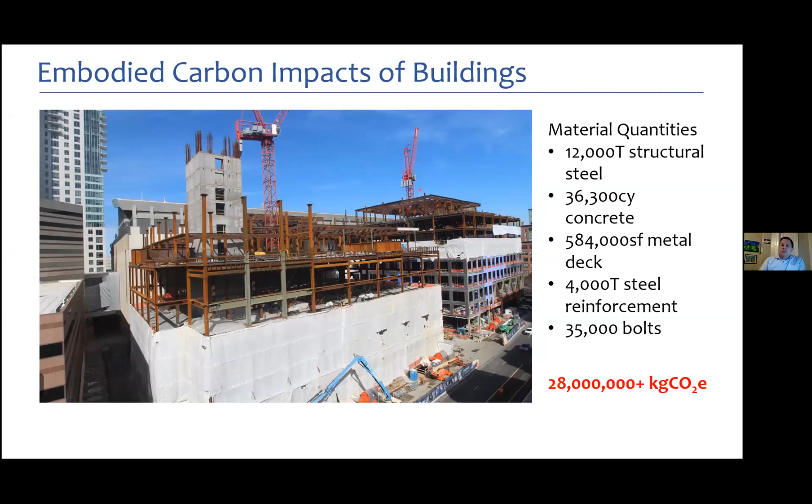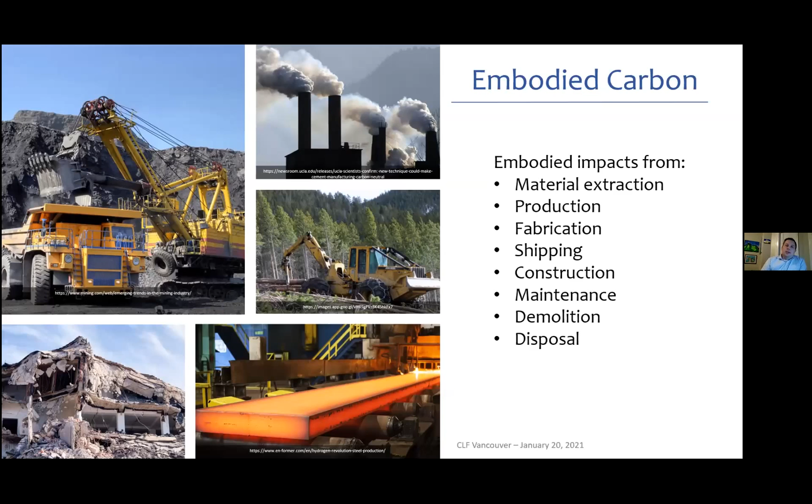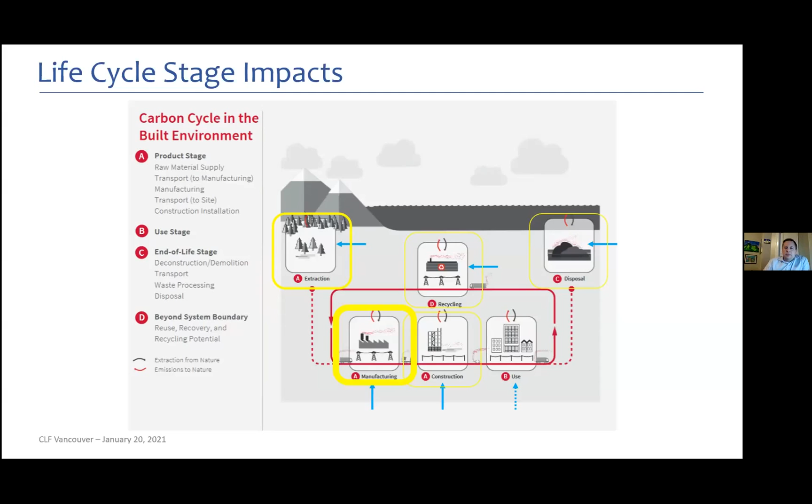I am not a life cycle assessment expert by any stretch, but I think it's important for structural engineers to understand the basics of it—that's about the most I can understand. With any building, there is a life cycle, and there are different stages associated with that. When I was looking into the embodied carbon impacts, they show up in a lot of the different stages, whether it's material extraction, manufacturing, construction, and to a certain extent the use case. If you're going through major renovations, there are certainly embodied carbon impacts associated with the materials of a renovation. But the more I looked, the more I realized that the manufacturing of the structural materials is by far the biggest impact, and that's something I'd like to touch upon a little bit today.

So here's a very approximate diagram of structural steel manufacturing and how you get to the environmental impacts. This was part of my personal learning curve. It turns out the structural steel manufacturing process requires a tremendous amount of energy and a tremendous amount of raw materials pulled from nature. Even in the case where steel is highly recyclable, you still have to break down that recycled material using a lot of energy and a lot of heat. On the flip side of the equation, there's a lot of emissions put back along with the dirty water byproduct. This is emblematic of extractions from nature and emissions to nature.

All of this stuff goes into different LCI databases that track the impacts of all the different processes, and those culminate into an actual environmental impact, like global warming, ozone depletion, acidification, and so forth. There are many different environmental impacts, but when we talk about embodied carbon, it's synonymous with global warming.

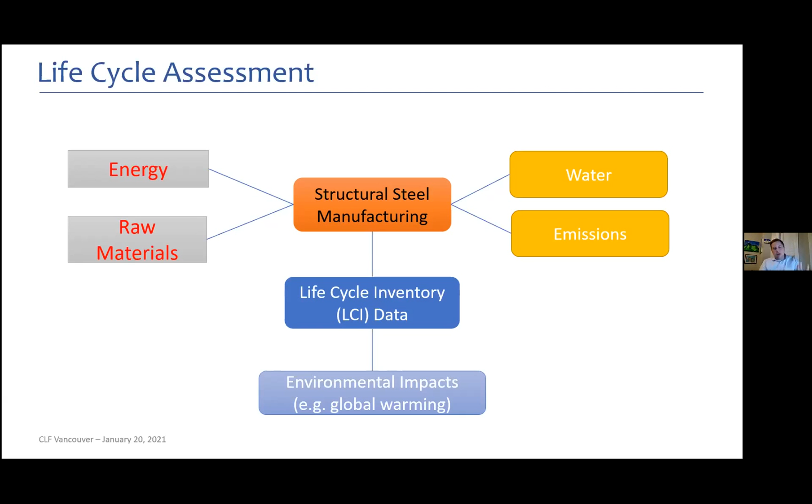This is an example of that, where you take emissions from three different greenhouse gases and multiply them by what's called a characterization factor. I'm skipping over a bit of stuff, but the point is that it's all being normalized into a single impact number, and that happens behind the scenes.

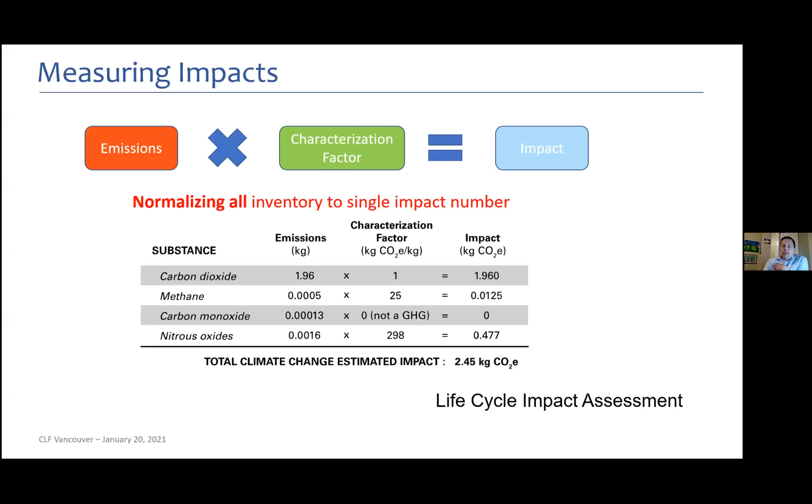That was important for me, and I think it's important for structural engineers and people in general who want to understand embodied carbon and where these numbers come from, because even in my short time working on this, in my own office, I've dove back into some of these numbers, so doing a bit of research ahead of time has paid dividends for me personally.

When it comes to structural materials, most have two sources of impact. One is they generally require a tremendous amount of heat, usually sourced from fossil fuels, which has a CO2 byproduct. Then there's a chemical reaction where there's an off-gassing of CO2, so it's sort of a double whammy.

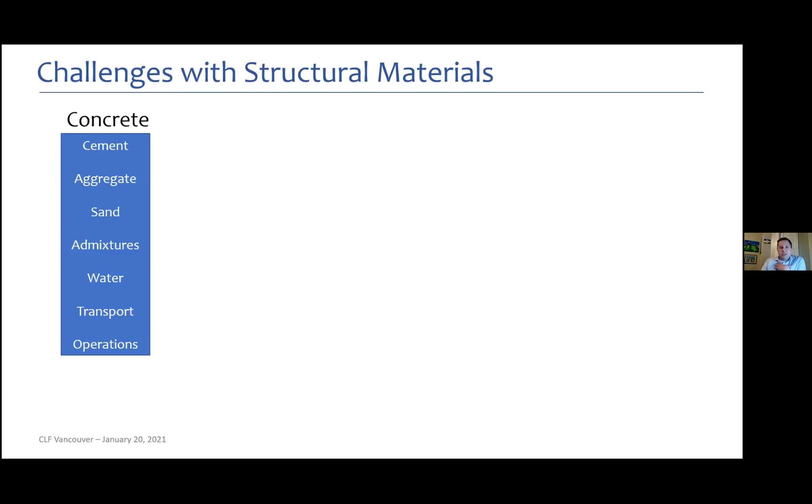That is very emblematic in the production of concrete. Concrete is made up of different constituent materials: cement, aggregate, sand, admixtures, water, and then there's transport and operations associated with all of that. But really, it comes down to 85 to 90% of the global warming potential impacts being from cement production.

When you dive into cement production, you're basically breaking down limestone rock with a tremendous amount of heat, and there's a byproduct of CO2. As it turns out, one ton of cement produced releases half a ton of CO2. That's not a particularly efficient system, right?

So to produce one ton of cement, half of the byproduct is CO2, which for me, every time I see these numbers, it's striking. Generally, depending on the numbers you read, cement production accounts for about 7 to 10% of the world's CO2 emissions. That's a number that often grabs people's attention.

If you're a structural engineer struggling to convince people why the structural materials and structural engineering world need to be involved with this, if you tell them that cement production of concrete is 7 to 10% of the world's CO2 emissions, they're going to start listening.

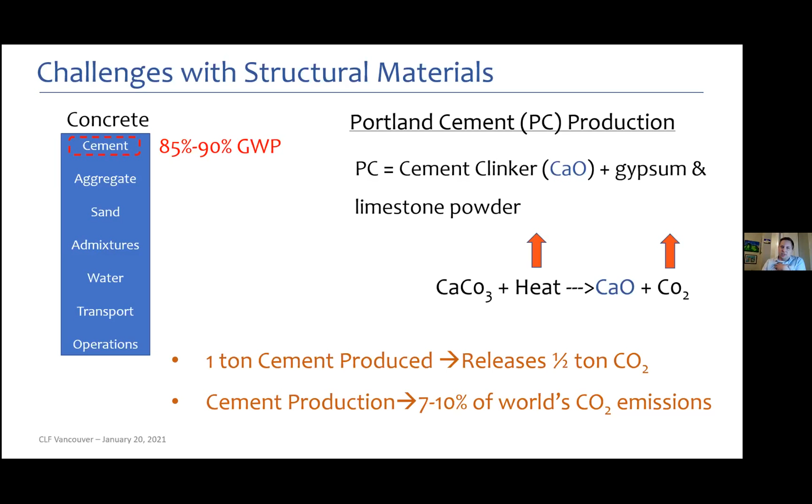One thing that's really important to talk about here is a declared unit versus functional unit, and specifically functional equivalence. It's very dangerous to just compare one ton or one kilogram of steel to one kilogram of concrete or timber without tying in some sort of performance metric to that.

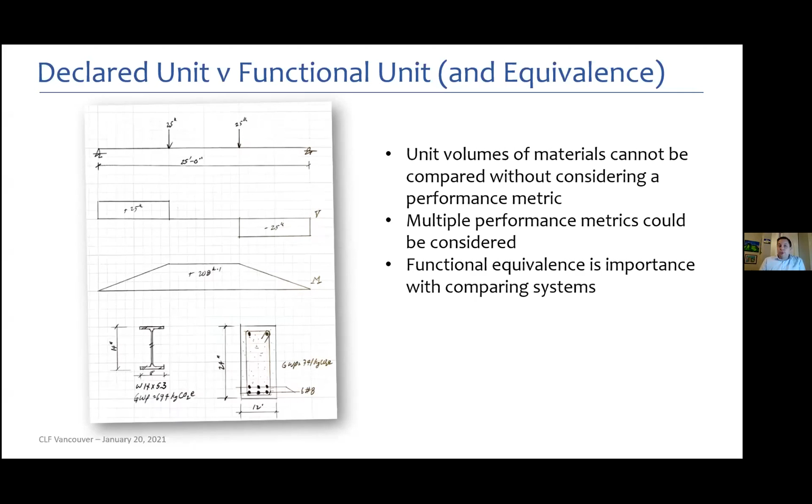Here's an example where we used a performance metric of a single typical floor at a particular live load and a particular elevation of the building, and compared a conventional steel framing system to that of a timber framing system. We were able to get numbers to compare.

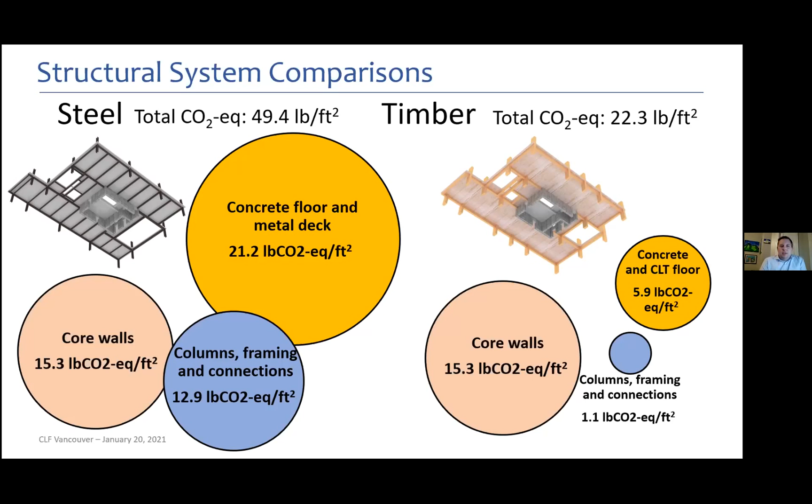Of course, there are a number of caveats here because this doesn't include foundations and the lower seismic mass and so on. But for this particular handful of performance metrics, this was enough for us to compare the embodied carbon that the architect, the contractor, and frankly the owner were very interested in.

You can go one step further, right? So you have the system-to-system comparison, but then you can start optimizing the system itself. In this example, if you have a steel base system and found a way to optimize it, whether removing beams where possible or reducing the impact of the concrete topping slab, you can get a reduction from that steel base.

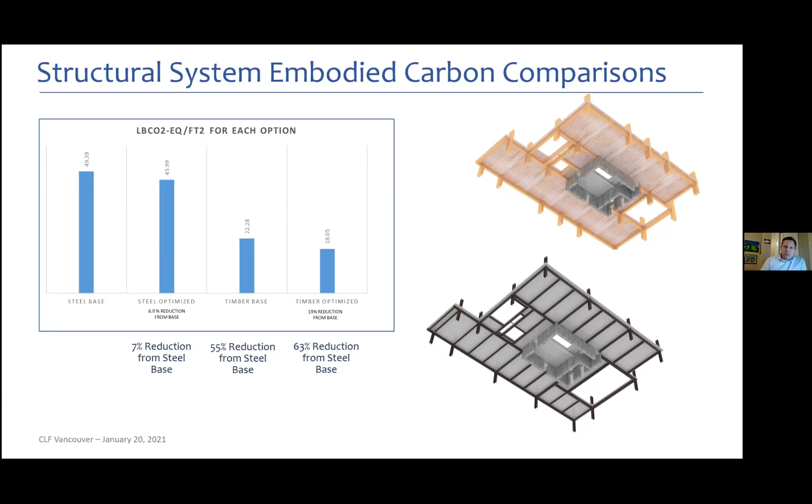Even in the timber condition, maybe you have a concrete topping slab on the timber CLT panels where you can find a way to reduce the cement content there and further reduce that. But again, I can't stress enough that it's very important for the structural engineer, architect, or sustainability consultant to make it very clear that you're comparing specific performance metrics.

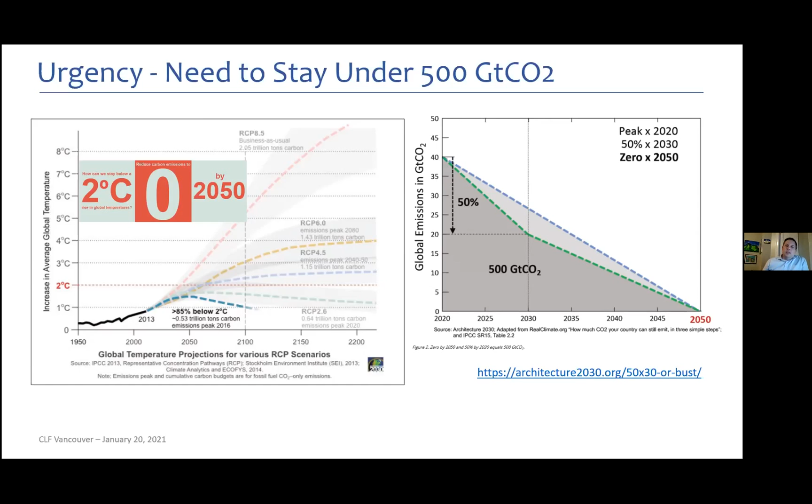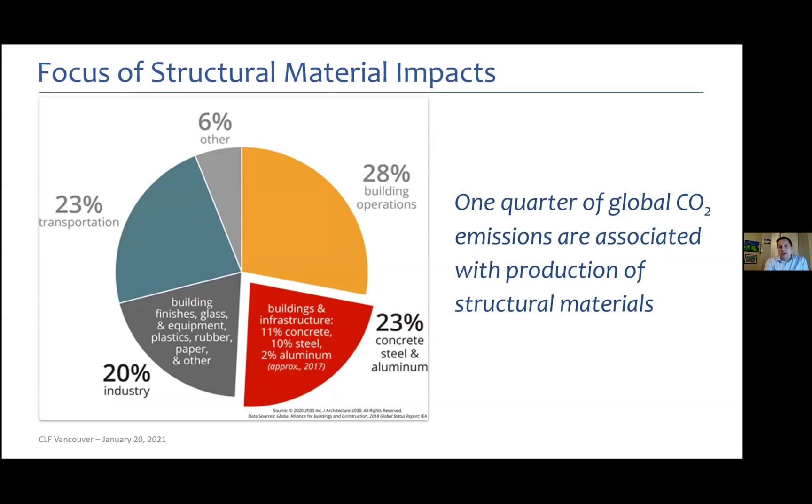When you look at the carbon impacts on a global scale, it turns out that a quarter of the global CO2 emissions are associated directly with the production of structural materials. That's another one, if you're trying to convince somebody why this matters in the structural world. Just sit with that number for a second: a quarter of the world's CO2 emissions are associated with the production of structural materials. It's a jarring number that should stick in the back of your mind.

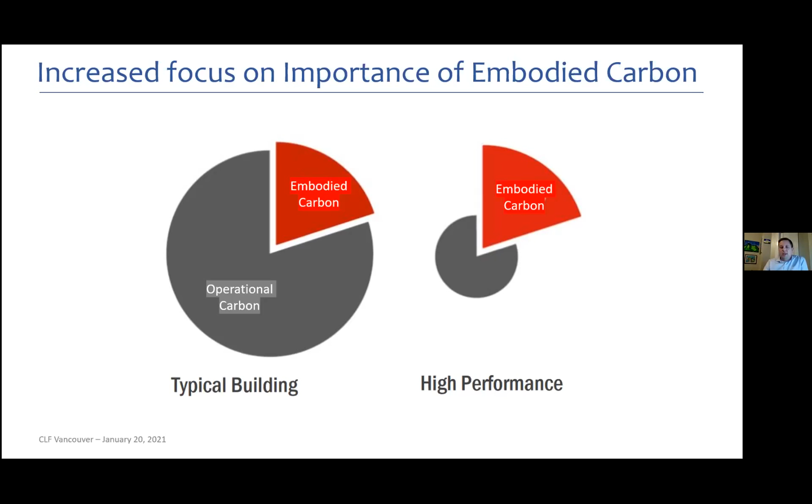One benefit, but an unintended consequence, of higher performing buildings where the operational carbon is coming down, has really shown a spotlight on the importance and the percentage of impact associated with embodied carbon. And this will only continue in the future unless we do something about it, as more and more high performance buildings come online.

So it's just emphasizing, and I'm probably preaching to the crowd, that the lower you can get the embodied carbon at the beginning of the project, the more you greatly improve the chances that we can achieve some of these net zero targets.

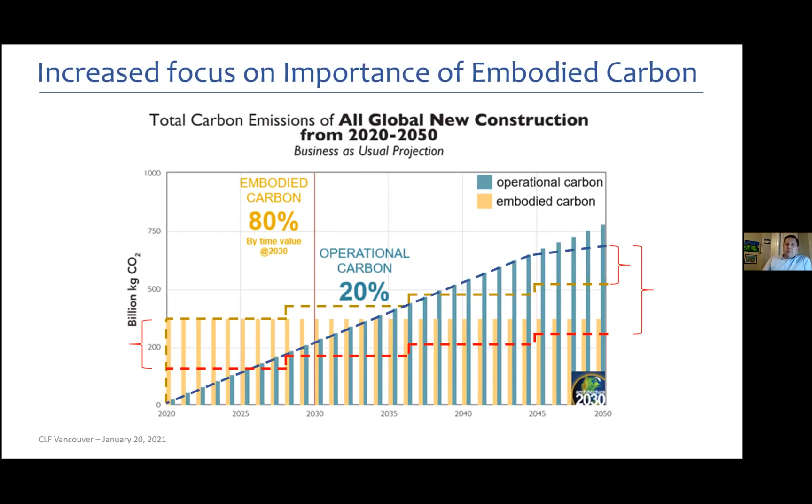Another aspect putting the spotlight on structural engineering is that, depending on which study you see or read, for new buildings about 50% of the embodied carbon is associated with the structure. In this case, a study done a few years ago showed about 50% associated with the substructure and superstructure for all different building types: office, school, and hospital.

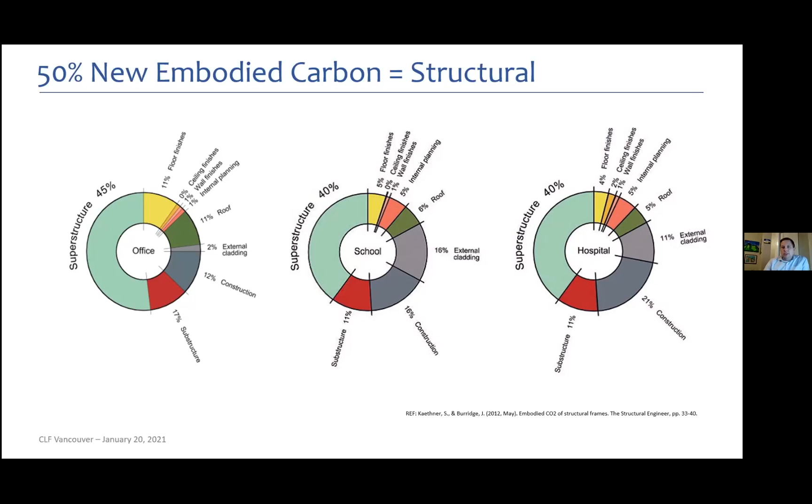Getting back to the structural engineer, to be fair, it's the whole design team - the architects, the sustainability consultants, the MEP engineers - but we really influence the project brief because we're connected to everything from initial concepts through construction and even into use and tenant work. So it behooves us as a structural engineering profession to really up our game, because we're talking to everybody.

Most successes come with buy-in from multiple groups, so why would we want to be the one group who's not contributing and buying in? Again, because embodied carbon happens up front, it's critically important that structural engineers are out in front as well.

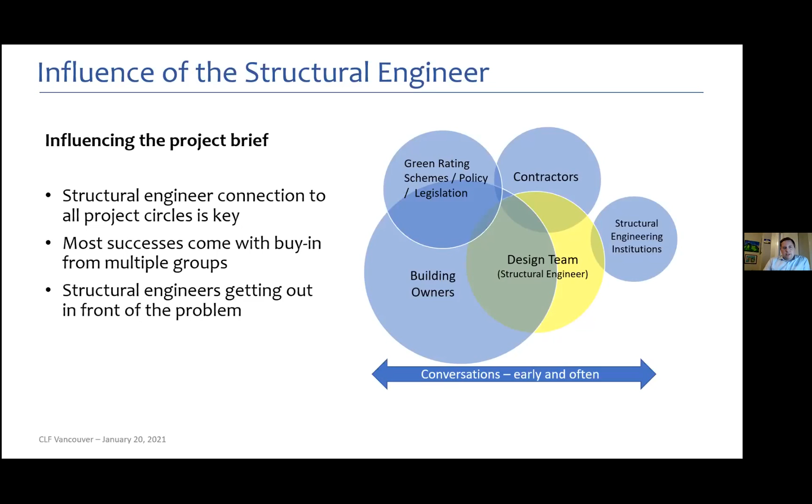Here's a not-to-scale plot breaking down the building stages: a design phase and a construction phase. If you look at embodied carbon and trying to optimize a system, early in the design phase you're reviewing different systems, and somehow you'll make a choice based on review of carbon budgets or some sort of target, and you pick that system. Of course, cost comes into play.

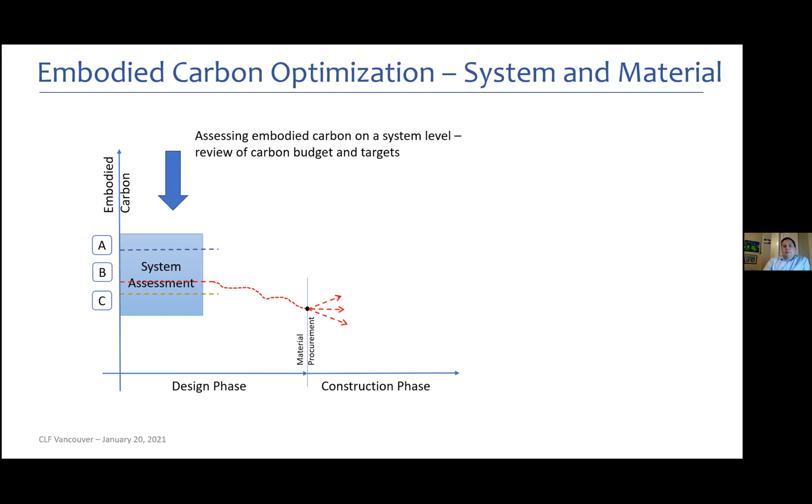Throughout the design phase, you'll be working on optimizing the system more specifically, probably focused on materials, and that's when specifications with material requirements for procurement are made. Then finally, in procurement, the contractor will do what they can to work with the required specifications.

But the reality is at procurement, we're a little bit removed, and so the impacts may improve, may stay the same, or may worsen. So all the more reason for us to make sure that initial embodied carbon is as low as humanly possible. The question is, where are we supposed to be? What is the benchmark for that particular system? And more importantly, where's the target? Where should we be aiming?

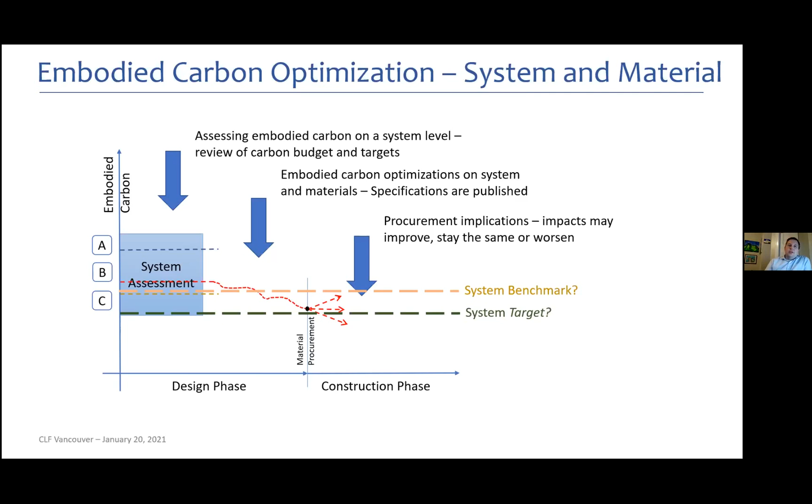I'm really excited because I think you're gonna learn a lot from Lauren, who's gonna get into all of this in greater detail. On the structural side, going back to optimizing a system and the role of the structural engineer.

Here's a simple chevron frame. We push on it with 100,000 pounds, and we have two braces: one is a wide flange, one is an HSS section. You do a comparison on strength, and the wide flange weighs a little bit more, so the HSS member is less. However, the material impacts of HSS, which is primarily from virgin steel versus recycled steel of the wide flange, the global warming potential is much higher for that brace.

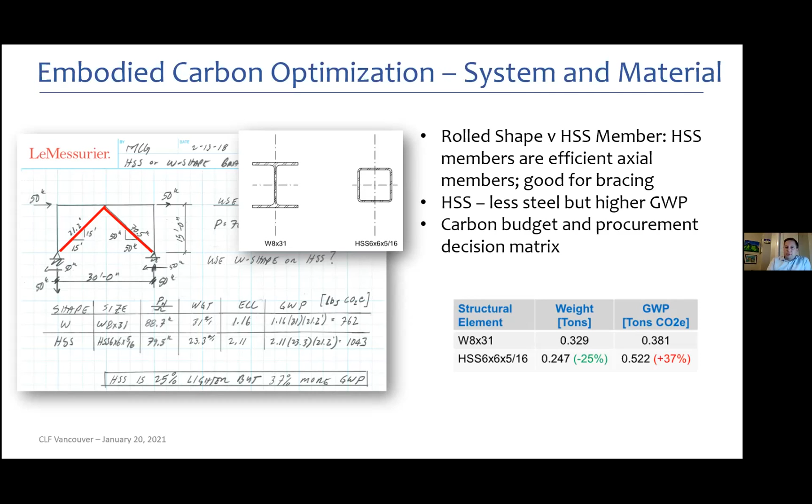And so that requires the design team and the owners, it requires another conversation to figure out what is the best approach here. It probably will be cheaper to go with the HSS, but it's going to have a greater global warming potential.

A similar, somewhat related example is column design in jumbo sections for W14s. Again, this is just one example of many, but in the United States, I'm not sure about Canada, it's probably the same, Grade 65 and 70 for jumbo sections is pretty much not a premium anymore. And they claim that the GWP per ton is about the same, if not less. I don't know, I haven't seen a lot of information on that.

The point is, in this particular example, the tonnage is less, going from a 14 by 132 to a 109, but the shortening is increased because, as all of you know, structural engineers at least, the stiffness of a member is not proportional to the strength of the material, it's always the same. So as long as you could make that work within the system design and the system performance requirements, you could have a lower tonnage.

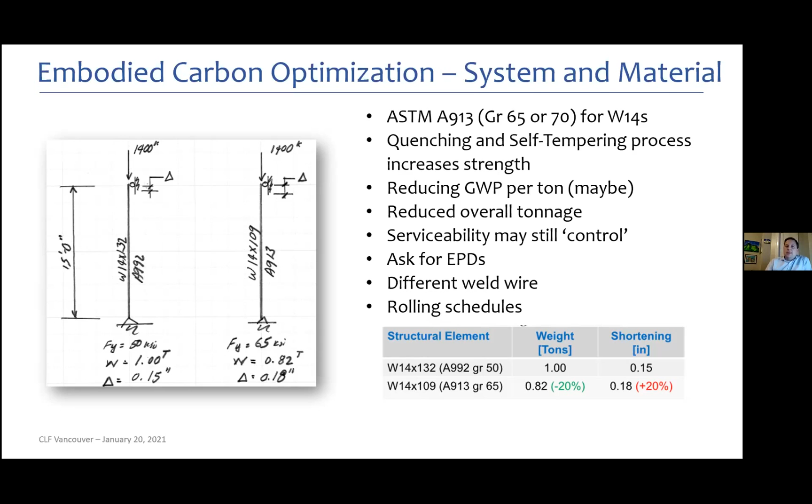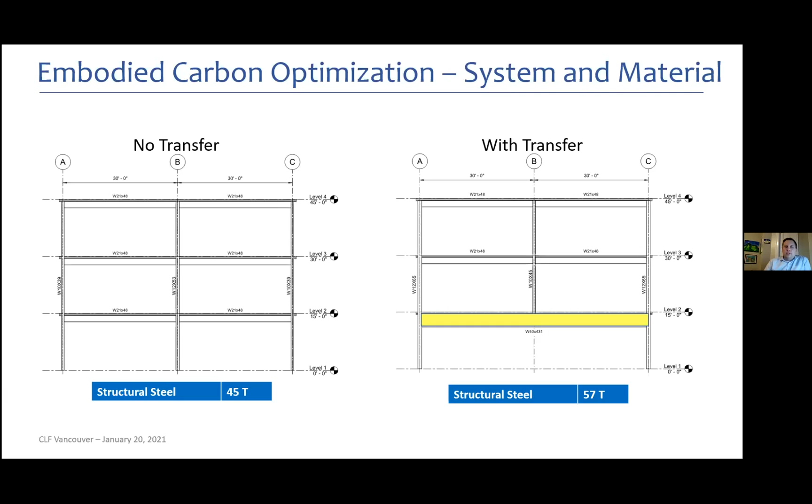Here's a classic example of eliminating a transfer. In this example, the owner wanted a nice retail open space at the bottom, but it comes at a cost, right? So there's 12 additional tons of steel in this particular case. Could the owner have lived with a column in the middle of that retail space? Again, this requires early collaboration and conversations with the design team.

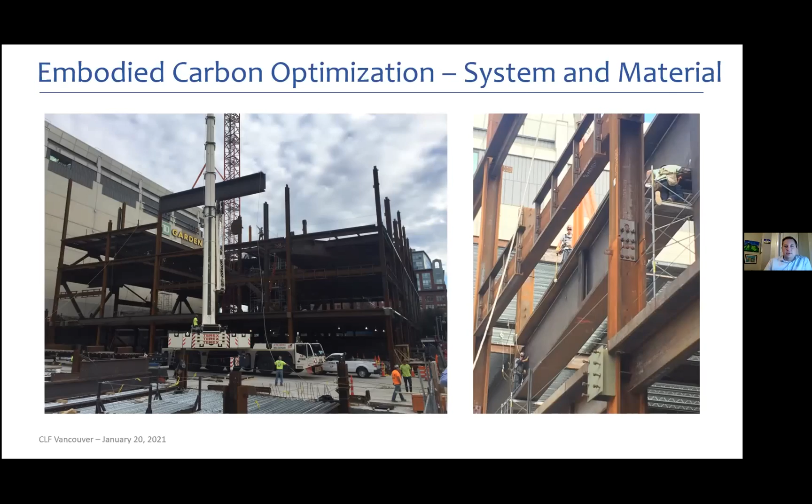This is an example where we transferred a 40-story tower on a 10-foot deep plate girder, simply to eliminate some retail columns in the retail space below. And again, it was really exciting and really darn cool to design this from a structural standpoint. But in retrospect, I do wonder if I could have done something to maybe convince the owner to eliminate this transfer. We can, as structural engineers, we can get creative.

The so-called short transfer happens very frequently, where we have a slight offset of a column, some sort of residential grid of columns above, and then a different grid of retail or parking below, and there's often these shorter transfers. But perhaps there are options to crank or slope the column and eliminate that additional tonnage. There is some rhyme or reason to this picture.

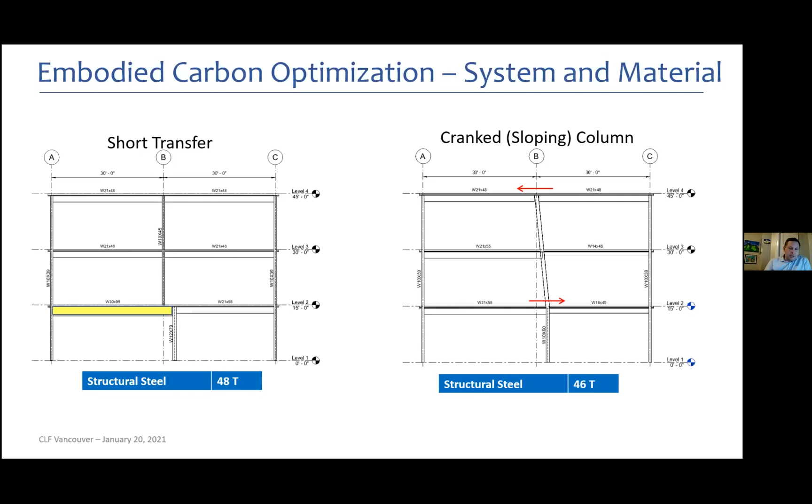This was an example of really working with the entire team to make this scheme work. The owner had purchased some land where there was air rights, so the caissons were built and installed in the 90s for a 30-story building, but the owner wanted to put a 40-story building on there. So in an effort to reduce the need for new foundations or foundation modifications, and thus a lot of embodied carbon, we worked with the planners.

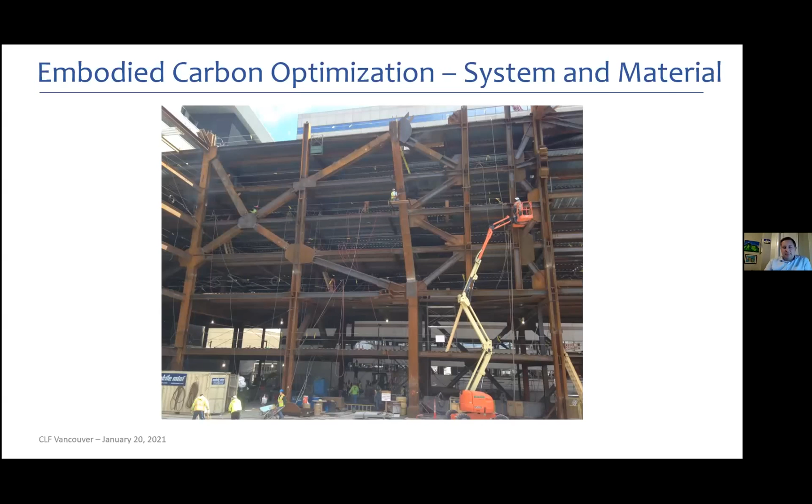We worked with the planners in the program to crank a few columns and push some loads, having some load shedding onto some of the caissons that had reserve capacity. So it's an example of early-on collaboration.

Here is another option that structural engineers can look at, and that's merging the so-called virtual work with minimum strain energy. Minor changes to the bracing resulted in a material reduction of 5%. Of course, there are caveats here because there's all sorts of connections and gusset plates to deal with, but the idea is coming up with options to reduce the material impacts.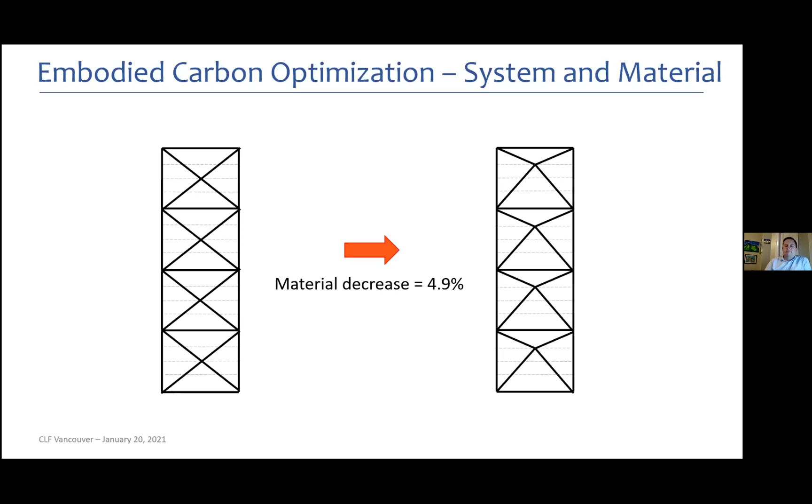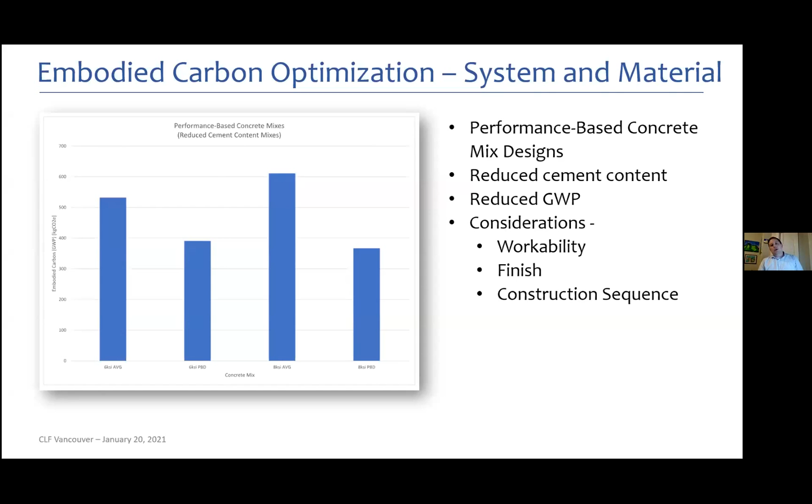So I do want to thank you. That was sort of an introduction to the impact of materials and the important role that the structural engineer plays. And I'm very, very excited to hand off to Lauren, who's going to talk all things SE 2050.